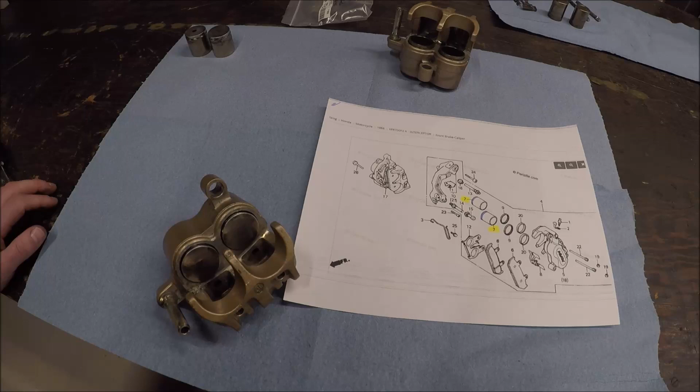So I've got a quick one for you, something I've never seen before. I was going through this 1986 VFR700, the RC26 Honda front caliper. I took about 36 years of dirt off it, and then I was trying to get the pistons out. I got them out about this far, and that's when I discovered something really weird.

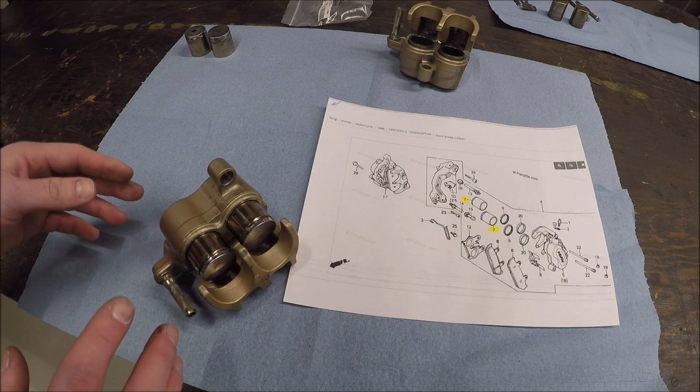A normal piston inside of here is going to be situated like this, with the flat end towards the fluid, so the hole inside of the piston is going to be towards the pad. But I see what looks like dust caps on here, and this is the diagram of it, and I've highlighted in yellow what I thought was just a dust cap.

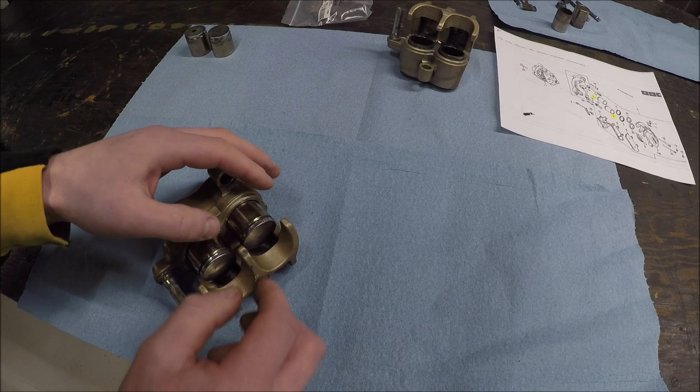So when I pulled the dust cap off, what I found was a surprise. I saw this - that's wood, and I've never seen wood inside of brakes before. I've heard of wooden brakes, but that's normally a derogatory term for how brakes feel, having poor pads on them. So knowing that the hole of the piston is normally like this, I just assumed somebody had shoved a cork in here before.

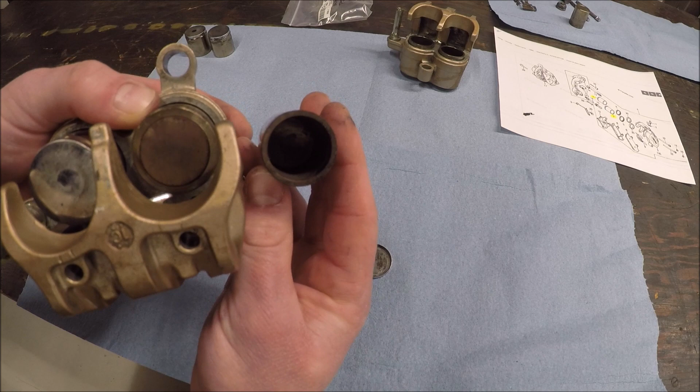It turns out, I went to the handy people at VFR World and they set me straight. This is actually a tiny little plug that can come out.

Alright, I'll edit that nonsense out.

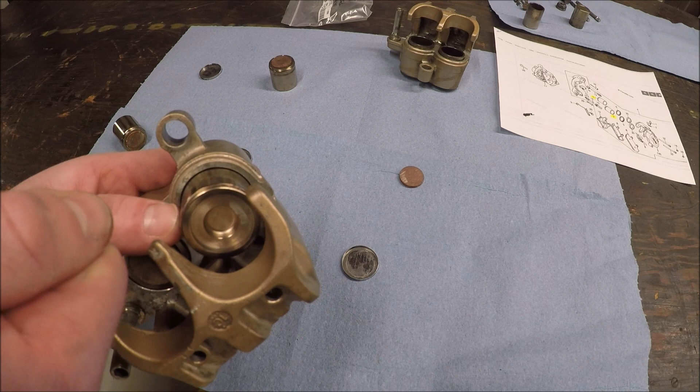So this plug can come loose like this. Now, if you've got a stuck piston and you have your regular piston pullers, you can't get them in there. So I ended up grabbing it with a flat wrench and then pulling it the rest of the way out. So now you've got your piston.

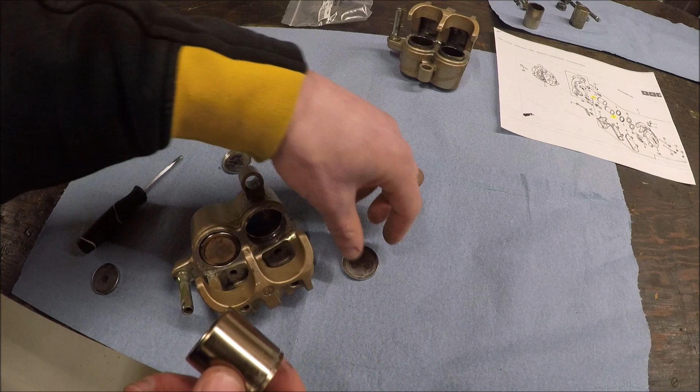This whole thing is full of fluid, so this thing gets way more full than a normal caliper does with fluid. What I was recommended to do is you could take this, throw this stuff away. The reason this was added was for sound deadening on the thing, to reduce the noise out of it.

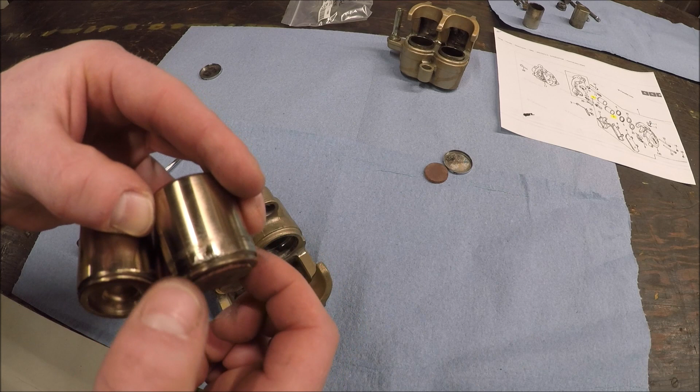Instead, flip it around, put it back in. The issue with doing that is that because it's situated this way, the part that's going to be exposed to the most corrosion is the part that's going to get all nicked up. And if you look at mine, this part is all rough. It doesn't matter too much if this part's roughed up, because this part's not going to be in contact with the seals, and we just don't want something damaging the seals. So if I flip this thing, it's going to tear through my seals immediately. So I can't flip this after 36 years of the corrosion.

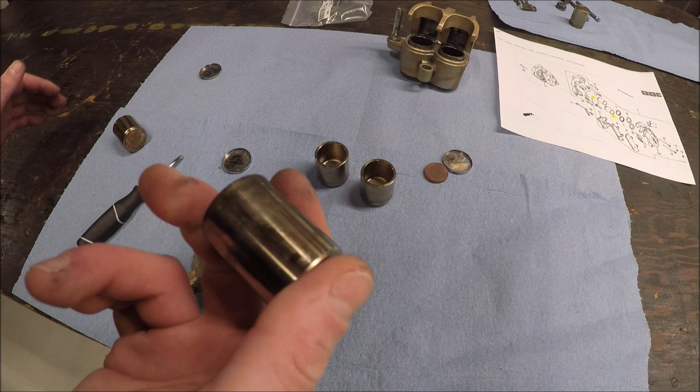So I actually have some - these will clean up better, but wait, these aren't the ones I was talking about, I put them in here. These are some pistons from a VF500, which will just go into here, and then I measured the height of this one against one of the VFR ones, and it's 2 millimeters taller, but after dry fitting them with some pads, I think they're going to fit just fine.